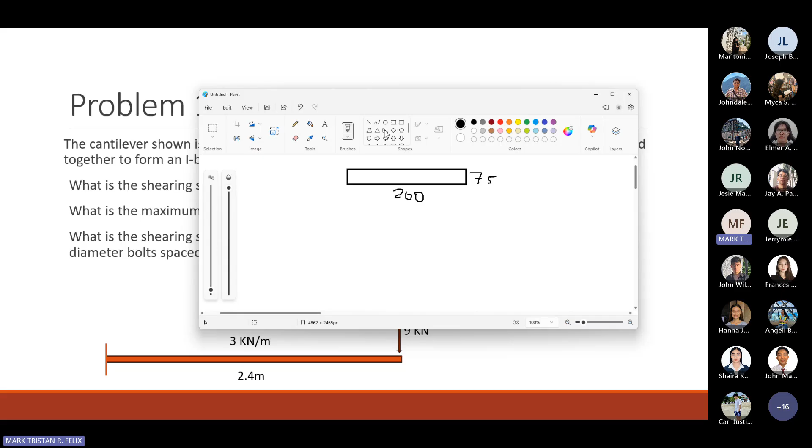So it says here: what is the shearing stress in the glued portion if the timbers are glued together? For the method of joining timber, one of the most effective methods for me is gluing, compared to nailing. Actually, the strength of the connection for timber is more effective when glued. That's why we often apply wood glue when constructing timber structures or anything made of timber, like a table or chair.

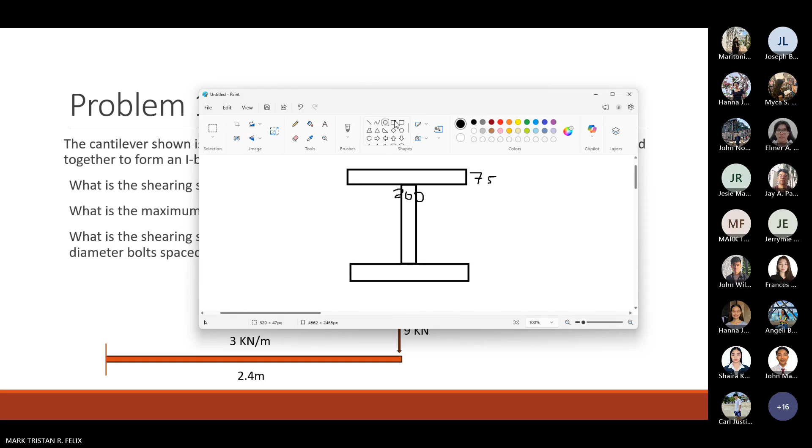So it asks: what is the shearing stress in the glued portion? If you could see the location of the glued portion, is it here? Yes, this is where we glue it. The next part asks: what is the maximum shearing stress of the beam?

Basically that's VQ over IB. Then, what is the shearing stress in the bolts? That means we will apply the formula for the bolt that we showed earlier.

If timbers are bolted together by a single row of 10 millimeter diameter bolts spaced at 150 mm apart in the row - so this is our given. We have a load, and this is the length.

Let's go to the solution. First, let's get the value at the glued portion. For our shear, take note of our given: we have a uniform load, plus a concentrated load at the end of the cantilever beam.

For the shear, that is 3 times its length, so that's 2.4 plus 9, giving us 16.2 kilonewtons. Please double check class, I have an issue with the answer - please chat it in the chat box so we can verify.

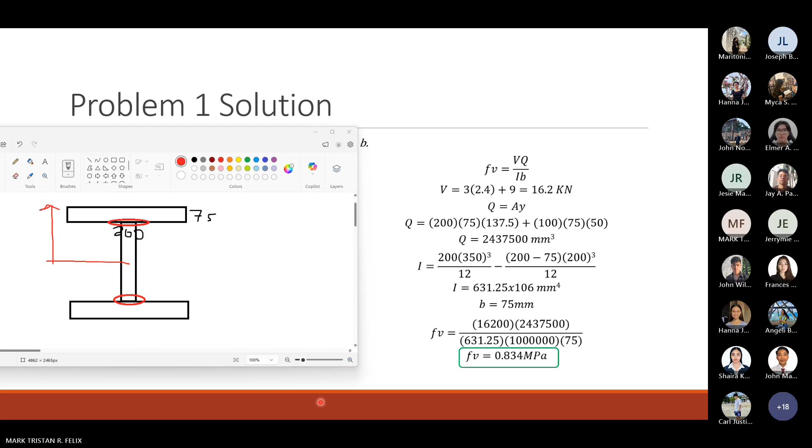Okay, sorry for the confusion. Anyway, ayan, so ito yung sinukat natin. From this end up until here, yan yung una. Okay.

And then yung sa sumunod naman, asan yung isa? Yung 100, it's the half of this, you multiply that to 75. And then ang distance naman niya up until here is 50.

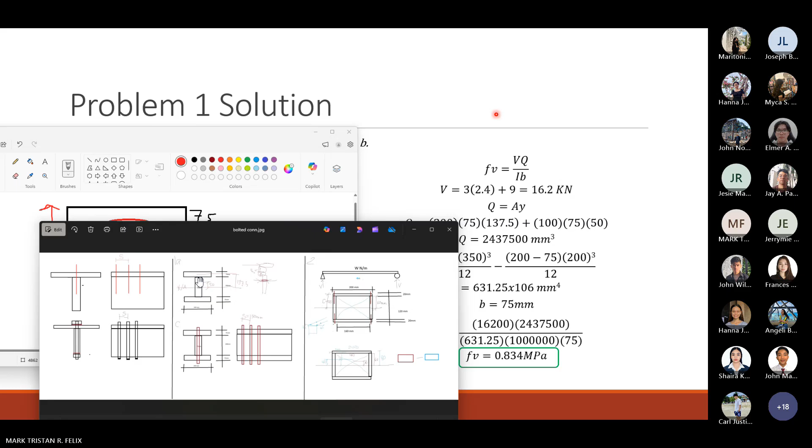Ayan, okay, going back with this one. So we would arrive with the value of Q na 2,437,500. And then same lang din naman yung I, hindi naman siya nabago. Okay?

So magkaiba lang yung ano niya, yung BD cube over 12, dahil nga kinuha mo na yung malaking rectangle or square, tapos we subtract yung dalawang nasa gilid. Supposedly, dalawang nasa gilid. Okay, so yun, with that, same yung I and then the B would be the same.

Ang tanging naiba lang dito is yung Q because it's the maximum shearing stress. And then so the answer is 0.834 MPa. Okay? And then for the third one, sabi dito, eto naman yung may kinalaman na doon sa mismong topic natin, which is the spacing.

Yung may kasamang spacing ng bolt. So ang spacing ng bolt natin is 150 and then 10 daw ito. Ayan, so let's go with the solution of that one.

So we use the same Q as what we have on the first problem kasi yan yung nandoon sa location ng ating tawag dito glue, so basically same. Ito naman is naka-bolt tayo. Now, with the V, same lang din naman yung V. The I would also be the same.

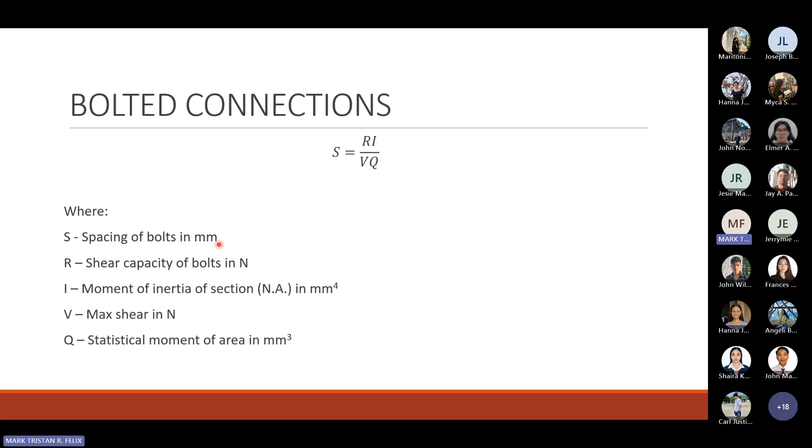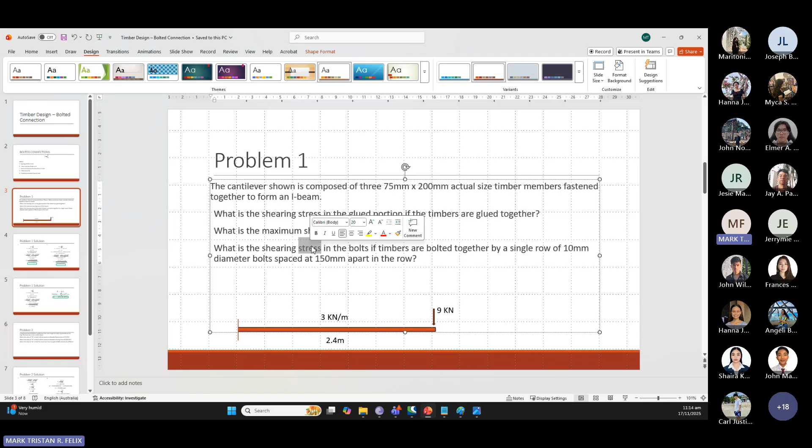Okay, now I think confusing siguro yung nasa given ay yung what is the shearing na lang dapat to shear capacity. Okay, palitan natin para hindi confusing. Baka kasi ma-associate niyo sa stress which is a of pressure share capacity.

Ayan, so with that, direct substitution lang tayo sa formula natin which is S is equals to RI over VQ. 150 equals R times 631.25 times 1 million, that's times 10 raised to 6 over 16,200. Let's convert this one into Newton. And then the Q, ayan, so nasa millimeter naman, nasa millimeter din naman tayo dito.

Then with the stress, ito, di ba ang formula pala ng stress? Oo nga, tama, sorry, tama pala to. Shear capacity, lagyan na natin. And stress, yeah.

So ito yung shear capacity. And then with the shear capacity natin, we just use the formula na ito. Di ba yan yung formula ng ating yung formula ng ating stress is equals to yung force times the perpendicular distance para sa shear stress, di ba?

Okay, pero dito nakabaliktad lang. So partial stress is equals to force over area. Pero yung area natin is not cross-sectional but it is perpendicular, parallel pala. Yung section parallel doon sa force. Okay, dahil shear yan.

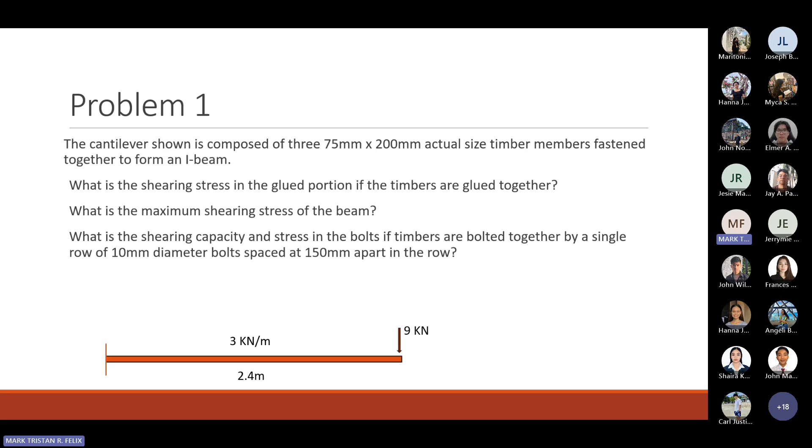So basically the computation is straightforward. I don't think it's hard to pick up. So that's the final answer for the first problem. Any questions?

No questions? Okay, let's go with the second problem. A distributed load of W Newton per meter, which is unknown, applied over the entire length of a simply supported beam 4 meters long.

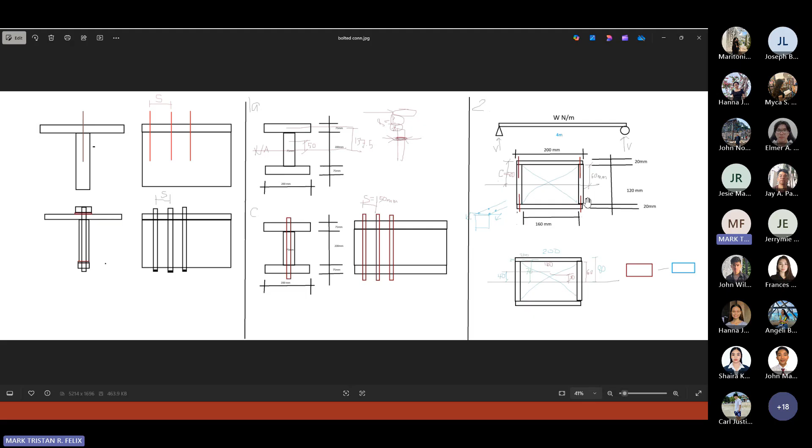The beam has the cross-section shown here. We have 20 by 200, then 120 by 20. This is 200, this is 160, so both sides take 20. That's the section.

So the question: first, the value of W so it will not exceed the allowable flexural stress of 10 MPa. Then get the value of W so it does not exceed the allowable shearing stress, which is 0.8 MPa.

So basically that's a comparison using the VQ over IB formula for the shear, and MC over I for the flexural stress. Since we have the allowables, we just substitute into those formulas.

Next is what is the value of W so that these screws have a shear strength of 800 Newton, with a pitch or spacing S of 50. That's the spacing, as shown here.

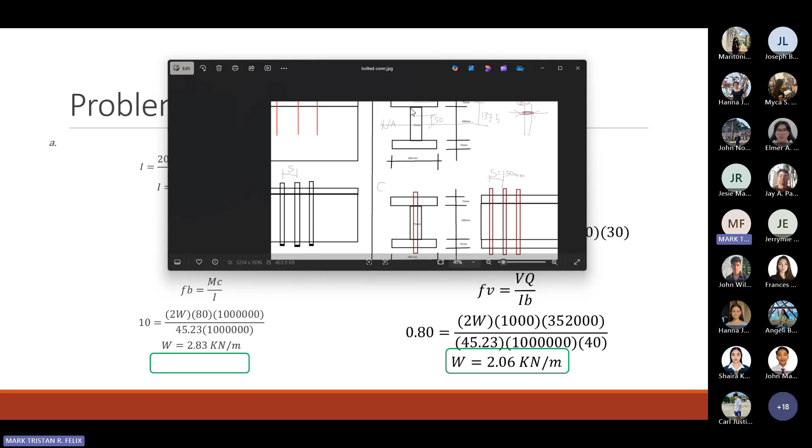Then our distance is 160 - that's 120 plus two 20s, which is 160. So 200 times 160 cubed over 12, then we subtract that from the 160 that's inside, with a depth of 120, over 12. I hope that's clear, class.

Then we arrive at 45.23 times 10 to the 6th mm to the 4th. Then maximum moment of a simple beam is WL squared over 8, which is W times 4 squared, and we solve for W, which is what we're looking for. So the answer for maximum moment is 2W kilonewton-meter.

So we substitute everything into MC over I - here's the M, and C over I. And the answer is 2.83. Any questions?

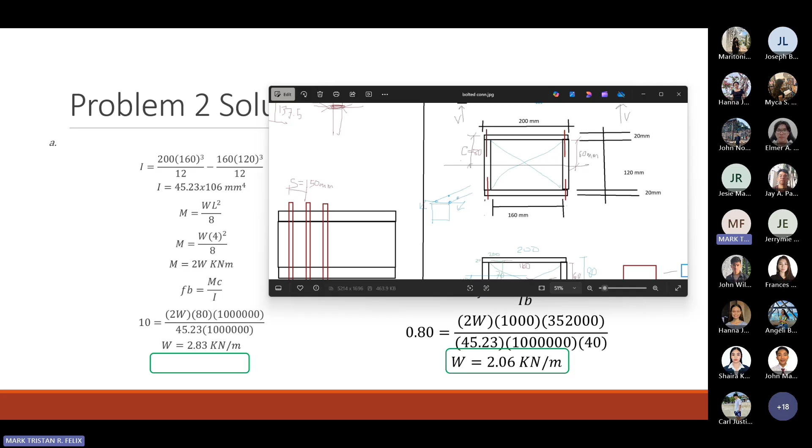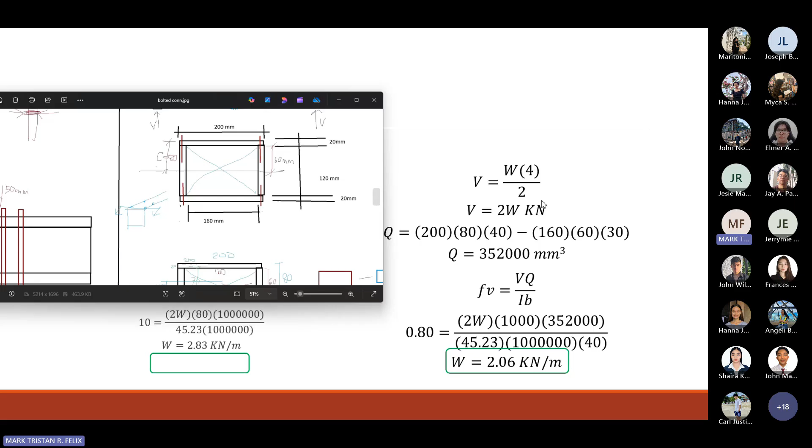Anyway, going back, let's go with the shear. Before we use VQ over IB, we determine the value of shear - the formula for shear in a simply supported beam is WL over 2, which is W times 4 over 2, so that is 2W kilonewton.

So that's our shear, with W unknown. Then for the Q, we get the larger Q, then the smaller Q inside, and subtract. That is 200 times 80.

Then times 40. Then the other one is 160 times 60 times 30, which gives 352,000 mm cubed.

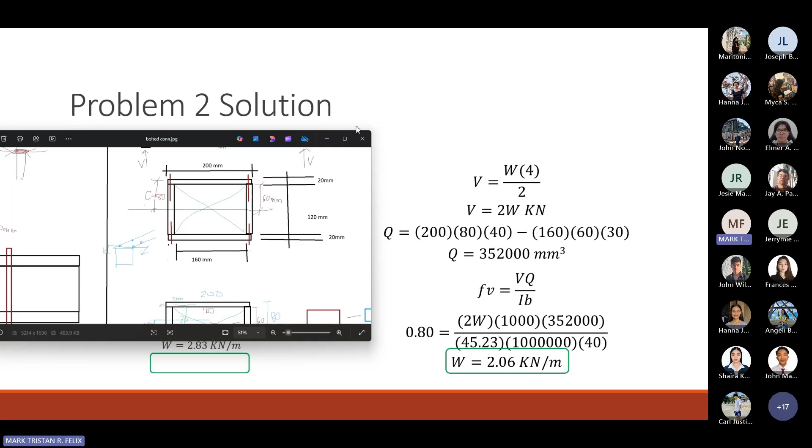So with that, we arrive at W equals 2.06 kilonewton per meter. So it turns out the value on the other side is larger.

So what's the question for the third part? That is, the value of W for our shear strength of 800 Newton.

So with that, for the Q, that is 200 times 20 times 70. Just check our section.

Then we substitute everything sa S. Meron tayong S na 50, given yan kanina. Then yung R, which is 800, nakuha na natin yan kanina doon sa first two problem. Then yung V, which is 2W, nakuha natin yan sa second problem. Then times 1,000 lang para sa unit consistency. And then yung Q, eto sa taas.

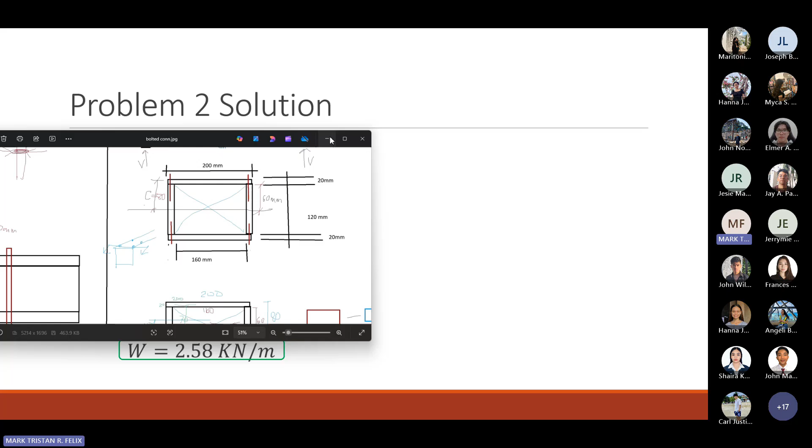Now bakit may dalawa dito? Kasi if you're going to check the section, dalawa yung ating connection.

Ito, reference na lang dito sa kung saan nakuha yung mga values natin. Okay, so ito pala yung latag ng ating pako. Kaya siya dalawa kasi on both sides, hindi siya dahil up and down na.

On both sides siya, kasi yung shear would happen on a same plane, di ba? So yung plane dito, yan yun. So yung shear dito, dalawa yung nag-a-act. Ito tsaka ito, sa kabila naman ito tsaka ito. Kaya times 2 lang, hindi siya times 4.

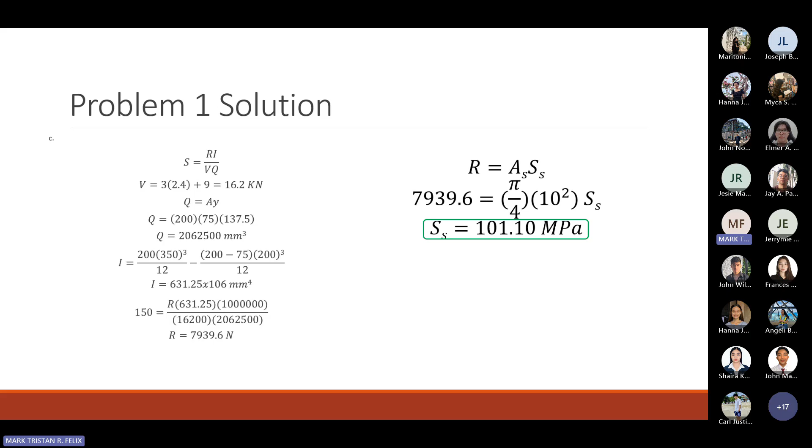So with that, the answer ng W is 2.58 kilonewton per meter. But basically, this is not based on the allowable shearing stress, pero naka-base yan doon sa shear strength nung screw or nung ating bolt. Okay, so yun, if we're going to compare 2.83, 2.06, tas 2.58.

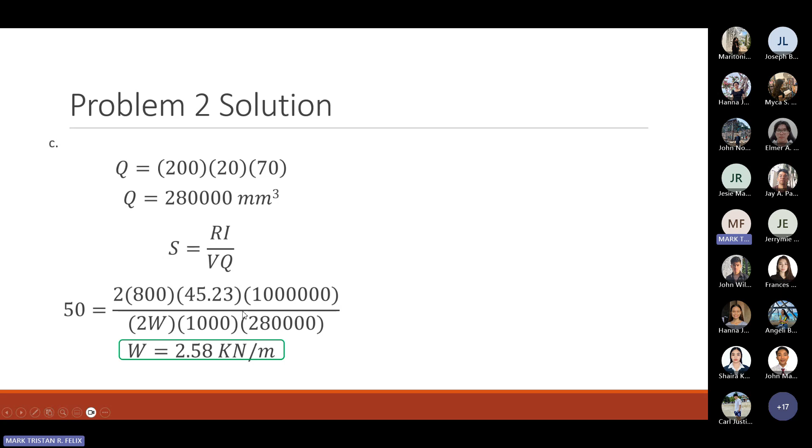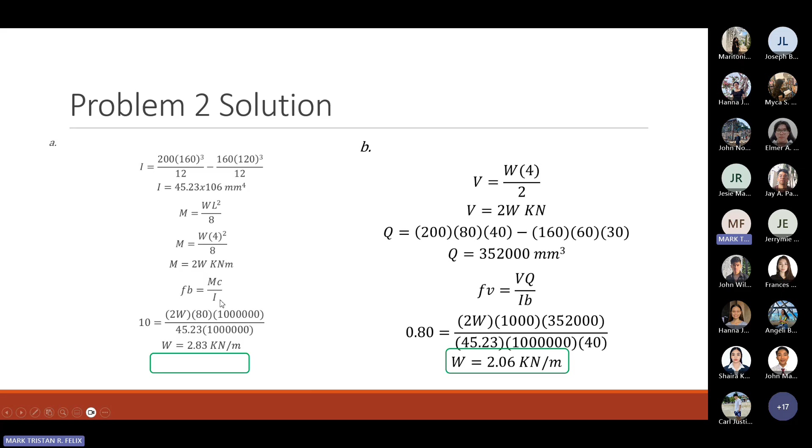Eto, so parang basically, ito ang kaya lang niya, base lang dito. Ito kaya niya to. Ito naman naka-base sa material eh, hindi naman to naka-base sa connection. Okay, any question?

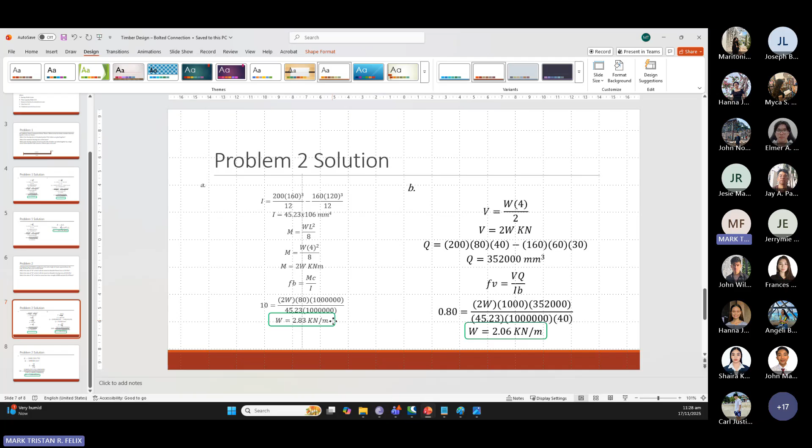Wala, sige, I think straightforward naman. So I will be uploading this slide together with this drawing for reference nyo. Ano naman siya class, madali naman siya sundan kasi straightforward lang. Ito, i-drop ko na dito sa ating chat box yung solution, yung illustration for that one.

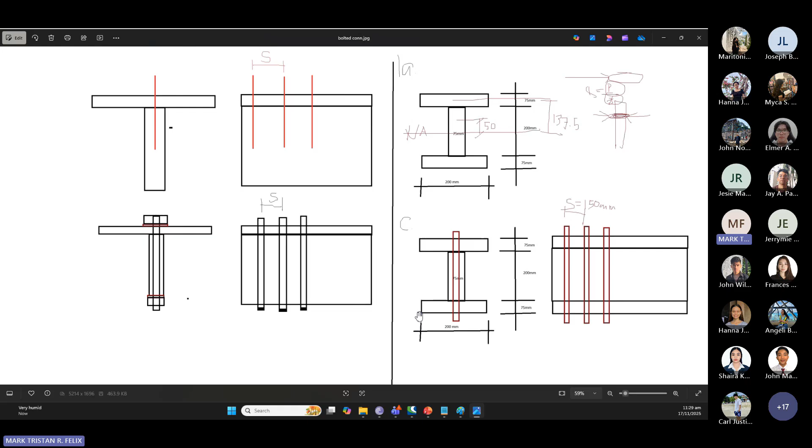Ayan, I think ang hindi ko lang na-ano dito is this one. Okay, ito, whenever we do the bolting, ito yung hindi ko na-focus kanina. Hindi lang siya particularly sa bolt, we also apply the same concept kapag pinapako.

Ito yung concept ng pinapako, di ba? Hindi mo naman yan inilulubog hanggang dulo, di ba? So hanggang kung saan man siya abutan, kung gaano kahaba. Ngayon yung S na sinasabi nating spacing, ito yan, yung spacing lang ng bolt or ng pako.

Ngayon, ang difference lang niya kapag nakabolt tayo is that butas siya hanggang dulo. Yung makikita nyo dito sa illustration, sa isa is that tuloy-tuloy siya hanggang dulo. Ito yung section on this view kapag sa tagiliran tinignan, ganito yung itsura. And ang normal application of the bolt is that kung ito yung bolt natin, tapos meron tayong nut, so naglalagay tayo ng washer bago ilagay yung nut at bago isuot yung bolt sa butas.

Okay, so yun, yung sa pako naman, di ba tayo naglalagay ng washer? Naglalagay lang tayo na parang washer kapag sa yero. Kasi baka lumusot yung pako kapag malakas yung hangin. Okay, so pwedeng umangat, lumusot yung pako sa butas. Kaya yung pako ng yero is para siyang may washer.

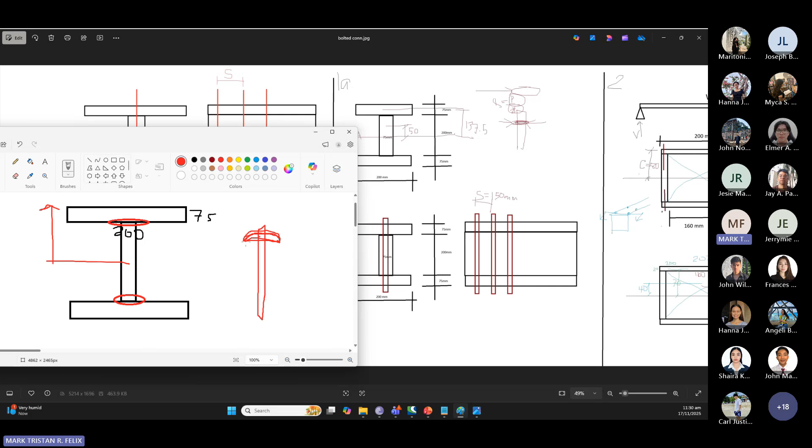Okay, para siyang ganito, yung may nakaganon na ano. I think nakakita naman na kayo ng pako ng yero, di ba? Para siyang paganyan, para siyang dito, may tingga sa ibabaw, pero parang washer siya. Okay, ayun, any question?

Wala? O sige, kung wala, i-discuss ko lang na mabilis yung ating plate. Okay, so discuss natin na mabilisan yung plate. So with this, ayan, ay laki.

So with this, for the plate, we will be using Excel with this one. Okay, so una is you prepare, tapos yan, you prepare a timber structure, yung plan and section. Basically ano lang, ano bang gamitin nating area?

Siguro gagawin natin ano, 10 meters by 12 meters. Yan, so bahala kayo mag-design. Now with that, in terms of the loading, kayo bahala mag-assume. In terms of the location of the column, kayo din ang bahala. Make sure na makakabuo kayo ng 120 square meter, ano lang, 2-story.

Para lang alam nyo paano mag-compute ng kahoy. So ang gagawin natin is, using this area and this dimension, bahala kayo mag-locate kung nasaan yung hagdan, kung nasaan yung joist, as in kayo bahala mag-frame. So yun, gawa kayo ng location ng column, tapos sunod location ng girder and beams. Then ang next yung gagawin is the joist.

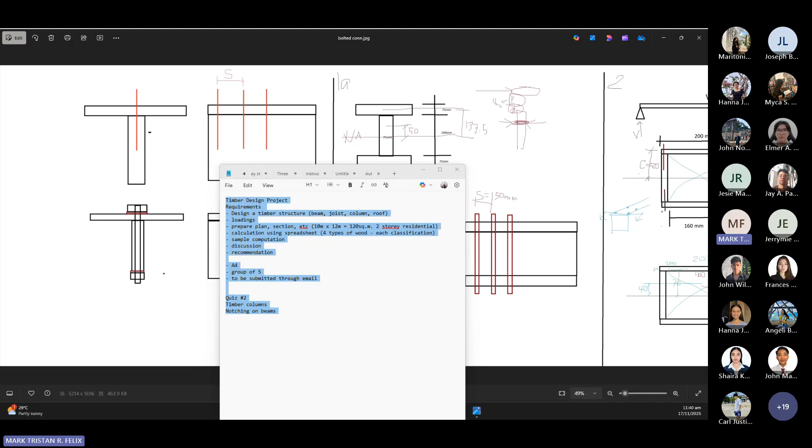Any question? Ito ay ipopost ko dito sa chat para kahit hindi ko siya ma-post doon sa Teams, posted siya. Ayun pala, deadline. Okay, due date, kayo tatanungin ko kailan nyo gusto ipasa.

Pwede kayo mag-chat sa chat box. You may suggest na tapusin siya hanggang bago mag-Christmas break, sabihin natin hanggang December 21. So pili kayo, December 21 or pagbalik natin ng January, January 10. Yan, January 10 na lang para Saturday.

Susulat ko dito, pili kayo dito. Mag-chat kayo ngayon sa chat box. Pag di kayo nag-chat, pipiliin ko yung January. Ayan na lang pala, sige, December 21, tsaka January 10. Baka pwede kayong sumagot. Hello? Gising pa ba kayo dyan? Wala?

Anong thumbs up? May nag-thumbs up. Sagot kayo, January 10 o yung iba. Actually, kaya ko nilagay December 21, maybe some of you would want it to be finished before Christmas, kasi syempre baka abala yung plate natin sa Christmas nyo.